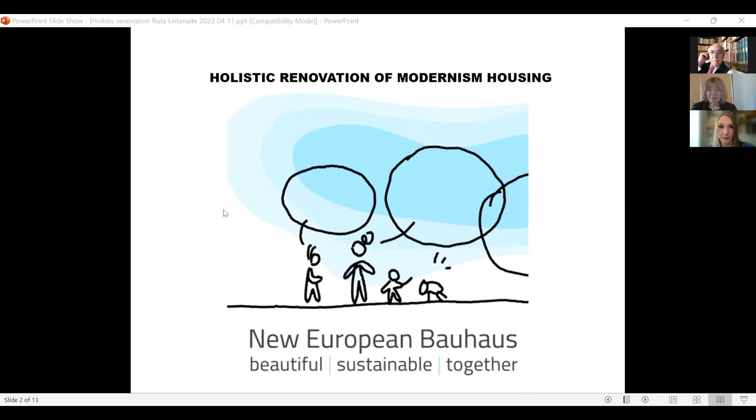In Lithuania, we have several governmental renovation programs, but something is wrong with them. Those programs have run for more than a decade, but the results are far from satisfactory.

Apparently, this is due to the restitution of private property after 1991, because in the Soviet Union there was no private property, so every housing unit belonged to the state. After independence, everyone got the right to buy real estate.

So after 1991, a foundation was laid for many problems related to the transformation of modernist housing, as every apartment now has its own owner and every decision must be taken with a consensus.

That applies not only to the poor activity and interest of the inhabitants, but also to the content and scope of renovation. Until now, the renovation of modernist housing, with some exceptions, usually ends with insulation and energy efficiency.

However, the New European Bauhaus is based on three values: sustainability, aesthetics, and inclusivity. The latter two are so far missing in our renovation endeavor.

So the main problem is that after renovation, the houses and whole micro-rayons, so-called districts, lose their architectural identity. No added value to the individual flats nor public spaces is created, and neither the communities nor the culture of living together are improved.

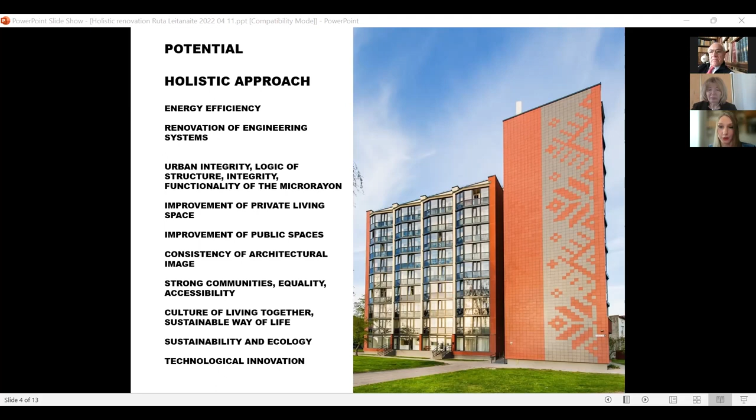Additionally, we search for chances for new financial and legal tools that will allow participation of different stakeholders in renovation. And also, we feel that although this housing stock is quite old, already 50 years old, we think it's a perfect ground for technological innovations to apply. So this initiative aims to gather an interdisciplinary think tank, as Angela mentioned, to create a methodology and toolkit for a holistic renovation and to test it in a pilot project.

What we've done so far in Lithuania: last year, in 2021, with partnership of the Ministry of Environment and the Ministry of Culture of Lithuania, the Architects Association of Lithuania had organized 2 discussions and a workshop with more than 60 participants.

The discussion was moderated by me, aiming to highlight the multifaceted nature of the topic and to gather a variety of ideas. An interdisciplinary panel was selected, featuring architects, historians, designers, geographers, city planners, activists, politicians, lawyers, construction materials producers, communities representatives, writers, designers, and representatives from relevant institutions such as universities, ministries, heritage protection department, Vilnius mayor, etc.

So we wanted everyone to get on board and to say what they think on the topic and what would be the main challenges in their field and what could be the opportunities.

When we were aiming at the topic, holistic renovation of modern housing, we saw that there are many different topics to address. So in the discussion, some questions addressed by the panelists were, among others, artistic and historical value: identification of the artistic, historic, and cultural value of the housing built in the Soviet period, second half of 20th century. How can we preserve those values during the renovation?

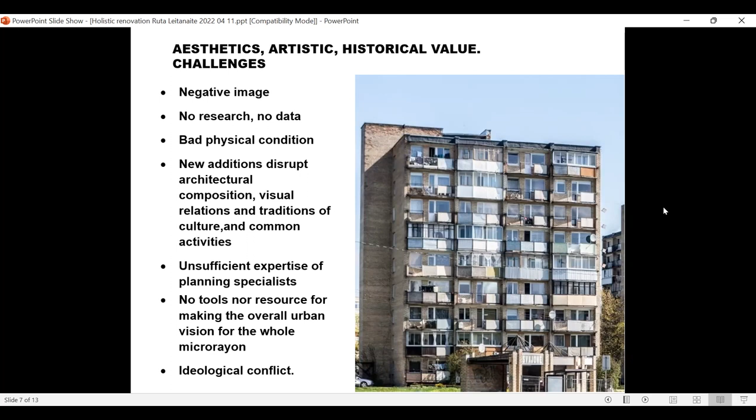Then we were talking about the vision. How can we perceive the reconstruction of this modernist housing? First, we have to shift our mindset and think that beautiful is not only about beauty. Beautiful is sustainable and functional. We cannot separate those three values.

Then we have to strengthen the architectural identity of those districts, so it creates identification and love by inhabitants. And then we have to create a renovation vision that would suggest an attractive environment as an alternative to the charm of the old town and suburbs.

Here in my presentation, you can see pictures of some districts that were built in the 50s, 60s, and 70s in Lithuania. This one in particular had one of the highest urban and architectural prizes in the Soviet Union at that time.

What are the tools to aim for that vision that we want? We think that a holistic research should be implemented before renovation, and by holistic we mean technological, aesthetical. We have to analyze the cultural relationship, talk with the community, and so on. This holistic research should be done before any project.

Then we propose that architectural competitions could be a tool to achieve the highest quality of the renovation. And of course, any renovation should result in some added public functions, because we feel the problem with this housing is that people live like in matchboxes and they don't meet.

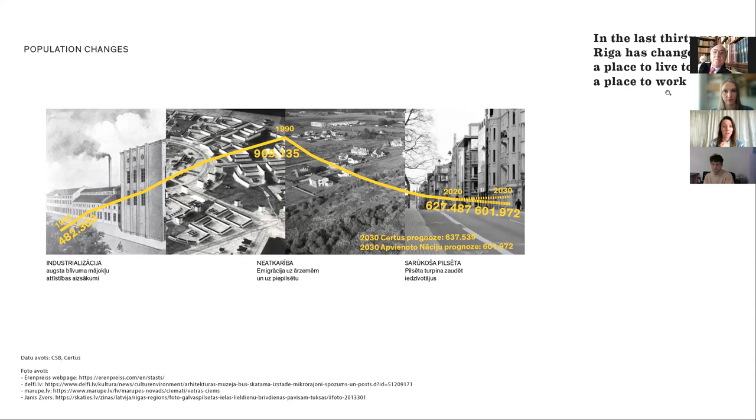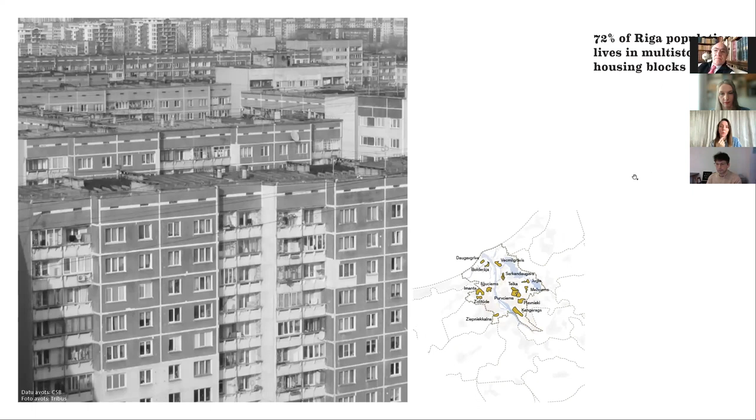Another interesting aspect is that 72% of Riga's population lives in multi-story housing blocks which are all similar. Between 2000 and 2020, population in Riga's suburbs has grown 20%, so basically people from the center are continuously moving out to the suburbs. Why so? Life in the suburbs offers larger living space - in the center average space is something like 56 square meters, in suburbia 92. They can have more green space, a safer environment, accessible primary education, and social benefits that altogether give a higher life quality.

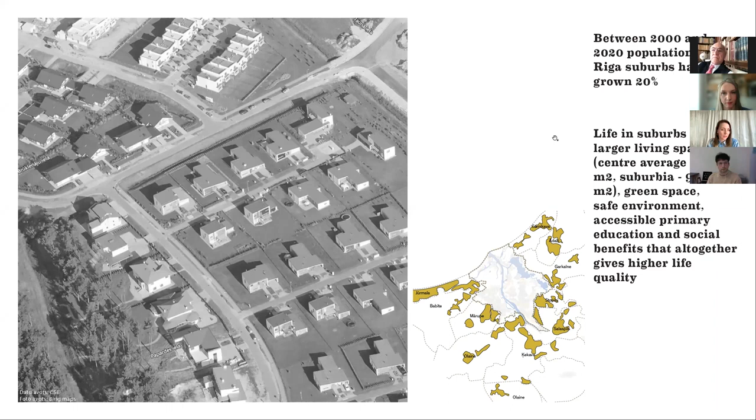Compared to Riga, when we look at other European cities like Copenhagen, Oslo, and Vienna, they are not only livable but also compact. So we're interested in looking at Riga as a potentially compact city, because the more compact you are, the lower the costs on infrastructure expenditure. Oslo achieves a livable city by working with the waterfront. Copenhagen treats velo infrastructure not just as infrastructure but as great public space. And Vienna is an example of great housing with good outdoor spaces.

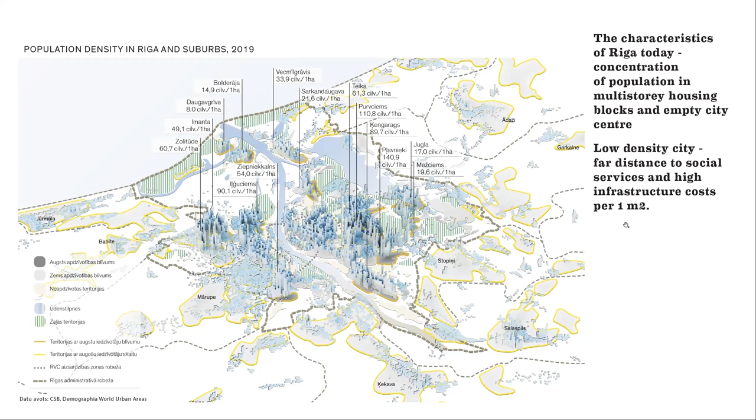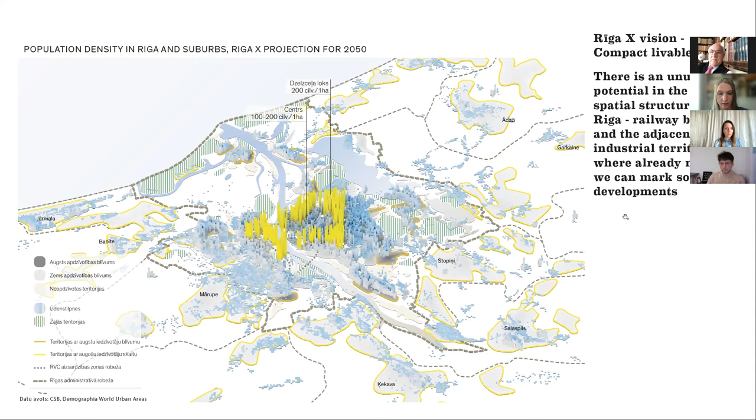Riga X vision is talking about a compact, livable city. We identified a space which is close, around the Riga city center, shown in the image as yellow bars. This is, in our opinion, the unused potential in the spatial structure of Riga: the railway belt and all the adjacent industrial territories, where we could already see through research that main developments are starting to happen around this space. It's a space next to the city center with the potential to be densified and developed as mixed-use neighborhoods. So compactness is a precondition for a livable Riga.

What we propose is that a big amount of the housing block inhabitants could also be hosted in the yellow part, the railway belt. Out of an abstract calculation, a 10 square kilometer territory with 200,000 inhabitants and 80,000 housing units generates around 200 people per hectare population density, similar to Vienna city center.

It's not that we are proposing to move the inhabitants entirely from the outskirts blocks to the center. However, due to the necessity of renovating the housing blocks, people will need to go somewhere, and also because these housing blocks have much smaller space per inhabitant, we need to find more space anyway.

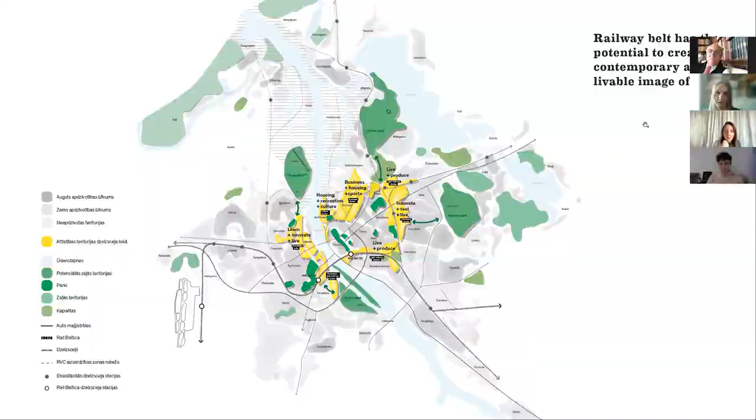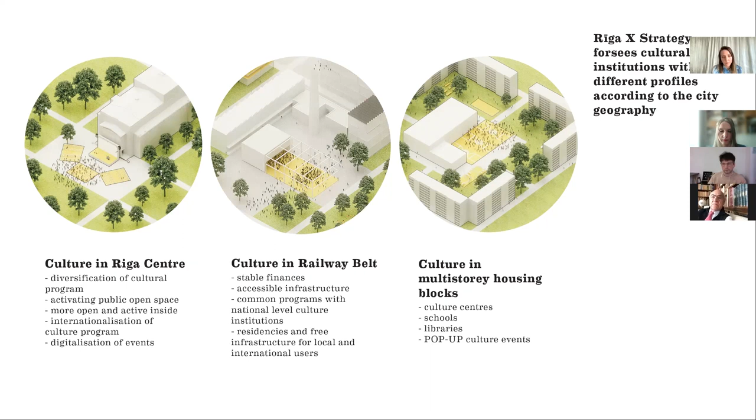Just a couple of spatial examples: the Rail Baltica railway connection has potential between the airport and the central station. Then a 5G network between Knowledge Mile, which is the knowledge cluster on the left side of the city center, and satellites of the biomedicine network, and potentially a drone corridor that creates an innovative basis for testing future technologies, including important materials and substances, for example organ delivery.

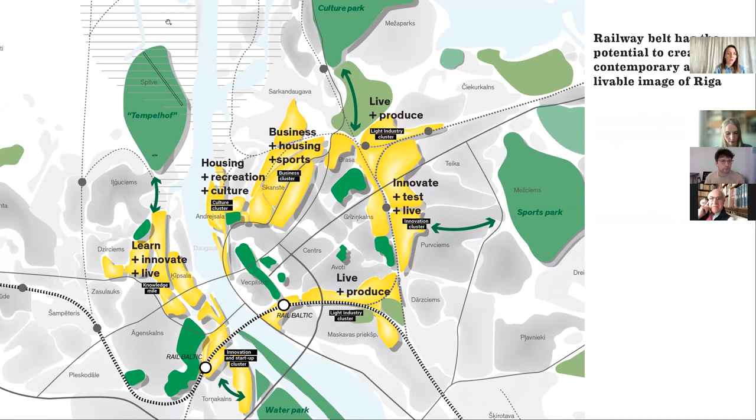So to conclude, it's all about the smart clustering and strategic location of right programs combined with housing, culture, innovation, and education.

So I will go a little bit more into housing. Housing stock in Riga is actually in a critical condition because most of it is built more than half a century ago, and out of around 6,000 multi-story buildings, only very few are renovated.

In terms of ownership, you also see that a very small part is a rental housing sector. It's mainly privately owned, also as a result of the privatization process.

But we have also an issue that approximately 20% of housing, which amounts to 64,300 housing units, has this split property condition, which means that in some areas like Purciems microrayon, this multi-story district, you see that some of the large buildings are actually cut by land ownership below. So they are forced to pay rent to the historical owners. And this is a kind of locked-in situation where development of those buildings is really difficult.

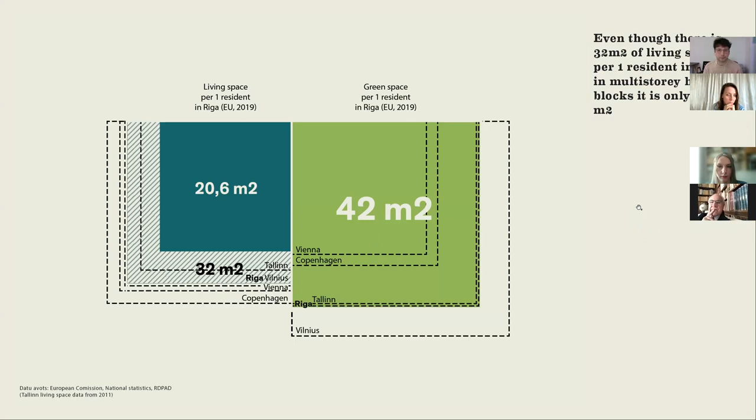In terms of living space, Riga has 32 square meters per person, but these micro districts have only 20.6 square meters, which is very low, while there's a big potential of green space, actually 42 square meters per resident in Riga. So we have this contrast situation with very congested apartments, but a lot of untapped potential around.

Who lives in Riga? We see that the inhabitant structure is changing a lot, and that requires a bigger diversity of housing that is also better suited for people who are living without children, which is predominantly the 75.5% majority of the people.

And this is the reason why we believe there needs to be institutional change. We call this, abstractly, the Housing Competence Center, which could deal with exactly the topic of affordable housing, both as rental and privately owned property. This would address young families with children, police, nurses, etc., people who urgently need access to high quality housing.

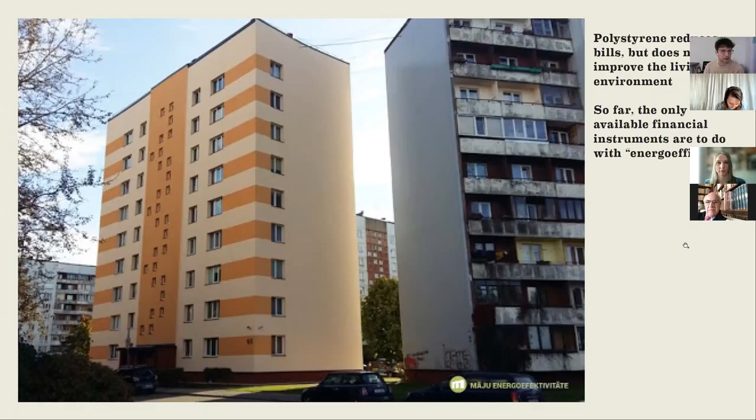The issue is that so far we have only had one financial instrument, and that is to do with increasing energy efficiency. We think this is absolutely wrong, because polystyrene reduces energy bills, but it doesn't improve the living environment in those districts. We believe there needs to be a new set of values for improvement of Riga's housing stock.

And all of these values should become new financial instruments. We classify them under three categories: architecture, environment, and social resilience.

In architecture, we are talking about spatial flexibility, that plans and sizes need to be really different and adaptable. There needs to be livable outdoor space - terraces, balconies, verandas - live and work options with studios, ateliers, and workshops. Collective communal space is very important in these neighborhoods, like babysitting rooms, collective kitchens, apartments for guests, workshops, saunas. All of these spaces are extremely important.

And we are also thinking about an innovative technological approach. There are some cases where, for example, contemporary timber construction materials could be provided by the local economy, and that could work really well together with the new development of housing.

Energy, of course, is part of it, but it's definitely not the number one point in architecture here. Environment, again, playgrounds, green courtyards, bicycle sheds, picnic tables, places for sport and recycling, mobility, shared mobility, proximity to regular public transport, and cultural vibrancy, access to public services, culture, education, and well-being, extremely important, as well as digital environment.

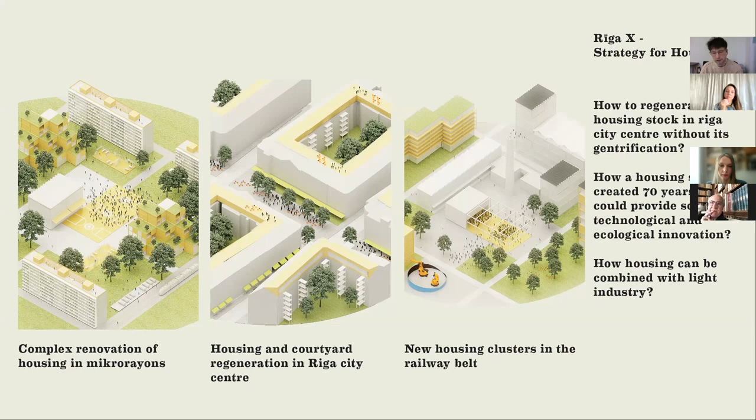Then the strategy is focused on three parts, and in one sentence, it's complex renovation of housing in micro-rayons. I will explain what we mean by complex. Housing and courtyard regeneration in Riga city center, and new housing clusters in the railway belt.

So for the city center, we ask how to regenerate the housing stock, which is here in the historical area, avoiding its gentrification. We believe that it's to do with architectural approaches such as special rules for ground floor public use of buildings, roof transformations and gardens, as well as freeing courtyards from cars and giving them back to the residents. The environment is the green courtyards with all the functions that I mentioned before, shared mobility options, activation of streets and squares, as well as educational aspects of the building culture.

And social resilience is extremely important in the Riga city center, because that is key to avoid gentrification, and it's the provision of affordable and social housing in the city center, not far in the outskirts. We also have some examples from Helsinki and from Oslo, which are related to our ideas.

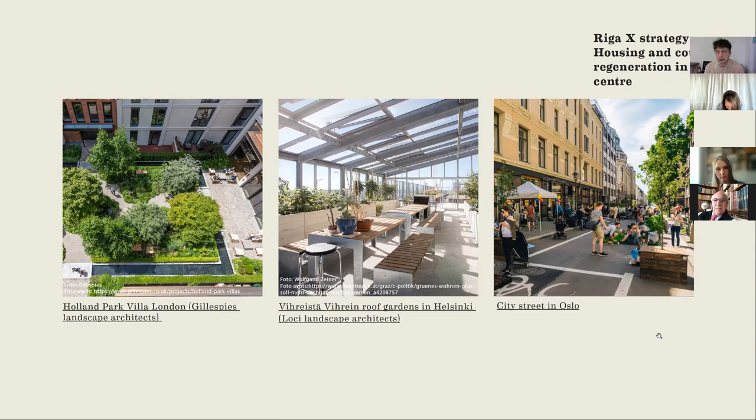Now, if you go to the micro-rayons and what we mean by complex housing — I would say that all of this research project you could define as holistic, but the approach of housing renovation in the micro districts really needs to be complex, because it needs to answer the question of how the housing structure that was introduced 70 years ago could deliver technological, ecological, and social innovation.

To answer that, of course, it's one part of architecture to really create these unique pilot projects, because actually there are not that many in the world that we see as good examples. But a big part of it is how they come to be organized and how they come to be realized, because it requires involvement of the city, it requires involvement of the state with some financial tools.

And it requires, we think, this additional institution, like this center, that brings together the residents, explaining what is possible and organizing these new pilot projects.

And we believe that architecture-wise, we definitely need to increase square meters of living space per resident in these neighborhoods. In terms of environment, again, it's about access to transport, mobility, gradual regeneration of the common spaces, and it's also very important to maintain environmental qualities during construction of buildings.

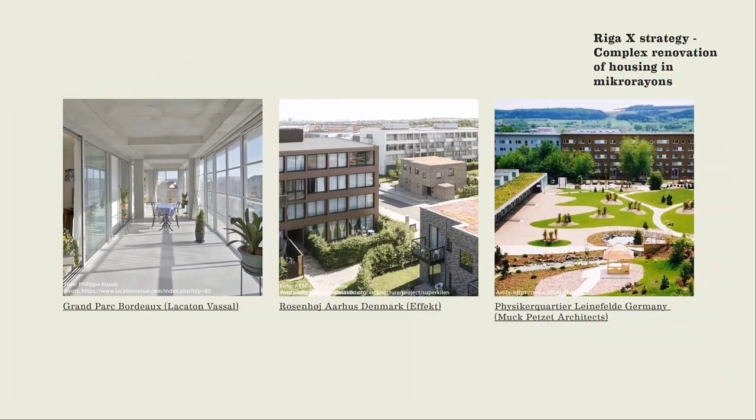There are some examples which I'm sure you are familiar with already. And if we go to the final part, it's the clusters in the railway belt, and the railway belt needs to answer the question of how many new homes can become part of the city with high livability and create a new identity for neighborhoods.

We believe there is a possibility to also reanimate some of the industrial ensembles which are on these brownfield, post-industrial sites. And we think that this is really a possibility for a kind of light production to come back, light industry to come back into the city.

So we think that these areas could be active all year round, all 24/7 hours a day, that they are never just sleeping districts, and they have a high cultural vibrancy. So there is the culture in here, cultural aspects, and there are aspects of these economic drivers like IT and education sectors, which are already very active in Riga and showing a big potential.

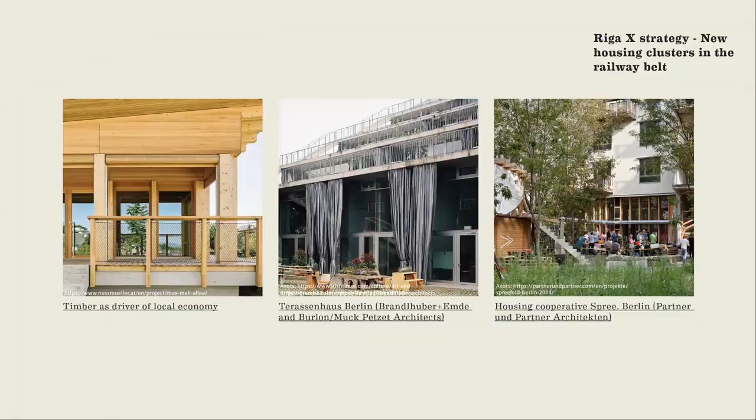So to conclude, this is our drawing of Riga with three very clear strategies for three parts. We are not ignoring other parts; we are just highlighting those parts that we think are key and more important and have more potential than others, to make this image of a livable city a reality one day. Thank you for the attention.

Congratulations, excellent presentation. Thank you, Dagny and Niklas. I am very happy to see and hear that Lithuania and Latvia are on the same page regarding the current situation, which is not very optimistic, but still with the ideas we are really on the same page. And I really hope that this conference is the start of our maybe future collaboration. I would be very happy to continue sharing ideas and expertise. Thank you, and we will move to the next presentation.

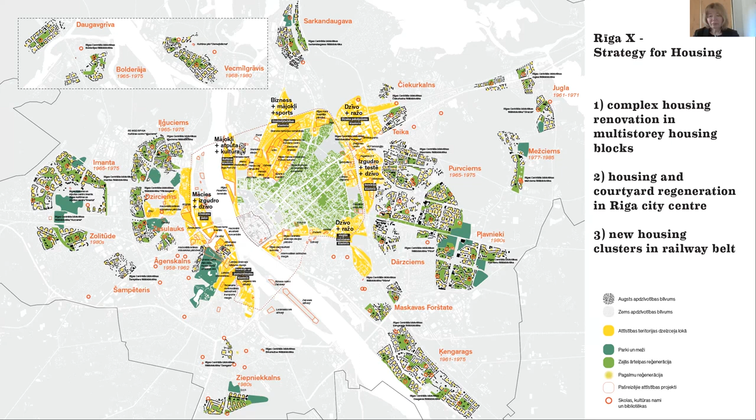Of course, when we were starting to organize this conference and discussing with Olena that she would make a presentation, the world was different. Right now, I think this presentation will change the whole discourse of this conference and the view on the topic. I am really, really happy and thankful to Olena and Arkady that they agreed to participate in our conference, knowing that they are probably busy emotionally and mentally with many other issues happening right now in Ukraine. Thank you very much for being here, dear Olena and dear Arkady.

I am sure this is not the end of our collaboration and sharing of ideas, but today we really are eager to know what is happening in Ukraine. I know that Ukrainians are sure that the war will end with a victory of Ukraine. We are sure of that as well, and it's high time to start thinking about how we will deal with all the legacy of war, and how we can create an opportunity of quality living for Ukrainians after the war. So Olena and Arkady, the floor is yours.

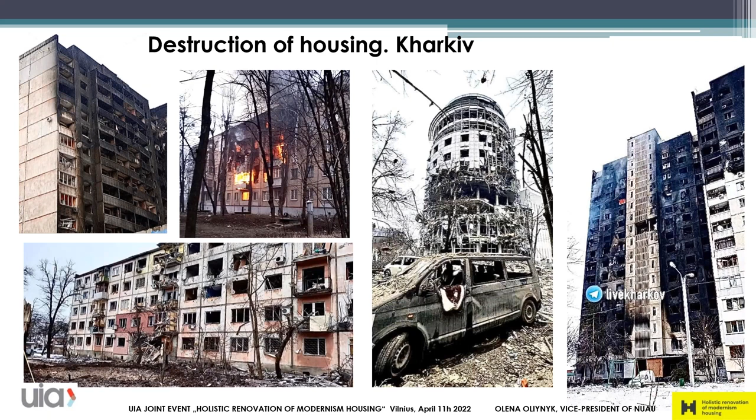And the enemy is destroying residential neighborhoods, hospitals, schools, architectural monuments, entire cities. Such cities as Chernihiv, Volnovakha, Irpin, and Bucha have almost completely destroyed buildings.

And do you know that the war is continuing? So how do we rebuild so many destroyed houses? Ukraine already has a bitter experience of post-war reconstruction and housing construction for migrants.

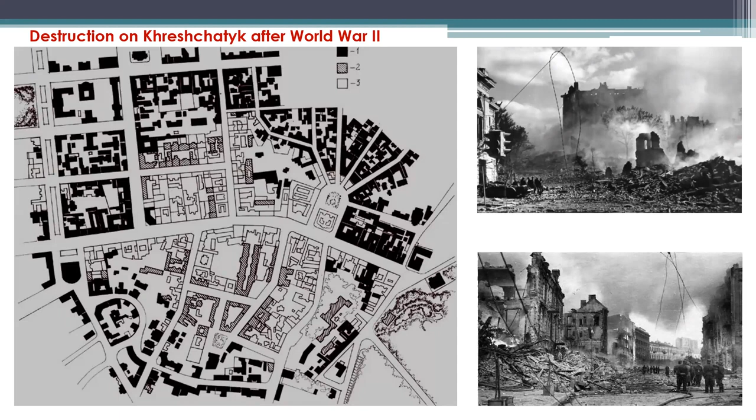The first large-scale restoration began immediately after World War II, when Kyiv alone was destroyed by 70%. Until the end of the 50s, Ukraine completed and rebuilt cities destroyed in World War II. Prefabricated houses, which allowed the construction of economic buildings at a rapid pace, then came to the aid.

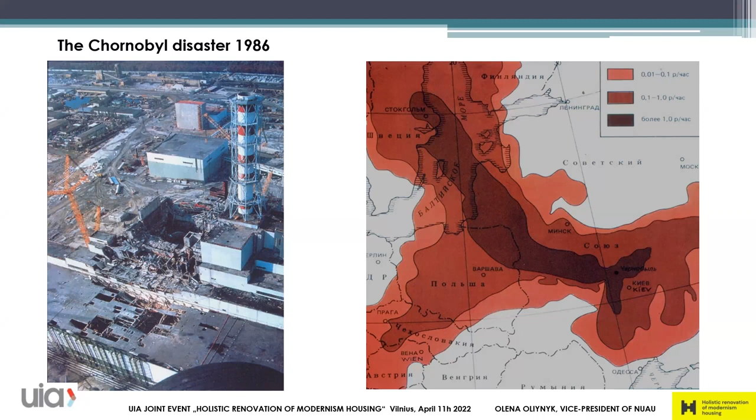Later, in 1986, the Chornobyl disaster forced thousands of people to become displaced. Then, in a short time, the task to relocate a large number of people from the affected area was solved.

Then a lot of work was done in a very short time. The basic principles were as follows.

Construction of new settlements on the basis of urban concept for each one, with the formation of all necessary functional zones. Then creation of complex project groups that worked on the construction sites until their completion, carrying out constant author supervision. Then simplification of technology and sequence of urban planning schemes, control over social content, use of standard projects of housing, schools, kindergartens, shops, communal constructions, engineering objects, with binding on construction site according to the simplified schematic master plans.

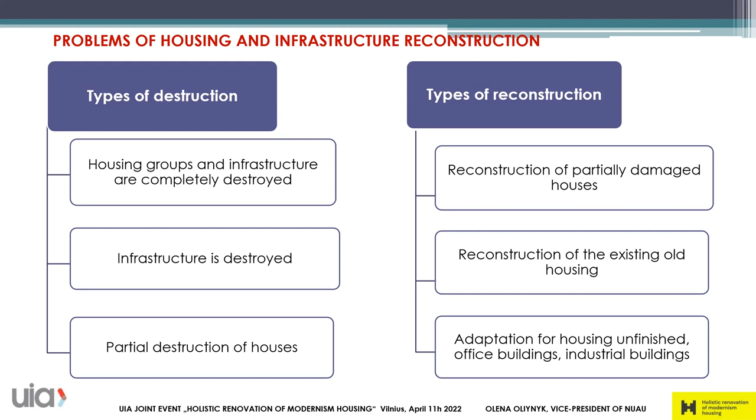If the house is damaged in such a way that it cannot be restored, then the question of its alternative replacement arises.

Hundreds of thousands of families will need new houses after the victory. The rapid provision of housing for those in dire need will obviously be addressed through the technology of prefabricated modular construction of temporary structures from blocks, containers, or from linear and flat prefabricated elements, or from a combination of both. But at the same time, we need to address the problems of building more long-term and comfortable houses.

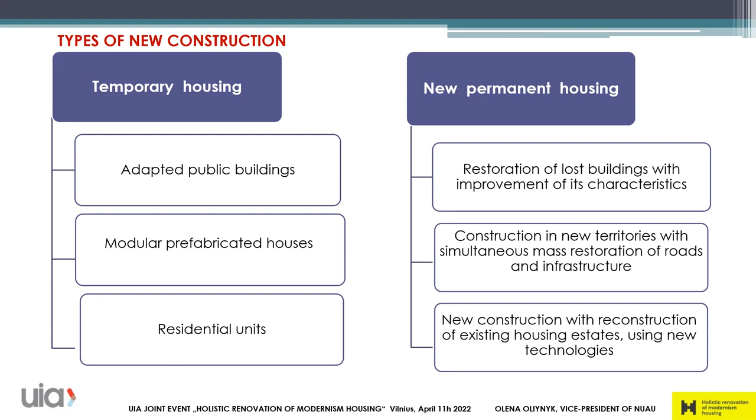Let us see some examples of reconstruction of existing objects from foreign practice.

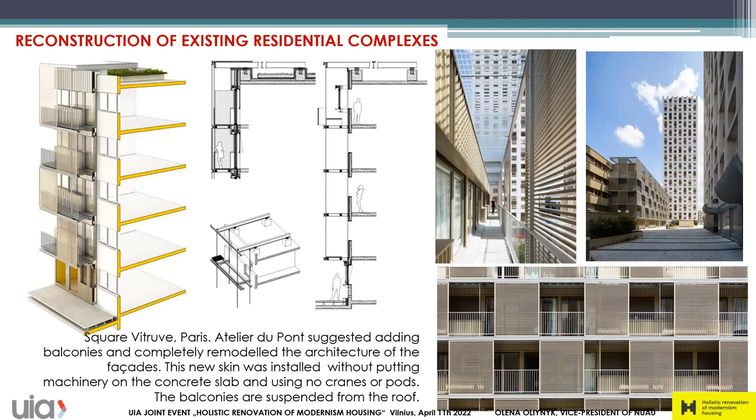This picture shows Square Vitruve in Paris. Atelier du Pont suggested adding balconies and completely remodeling the architecture of the facades. The balconies are suspended from the roof. Interesting that this new skin was installed without using any cranes or pods.

So the methods of reconstruction of residential buildings can include changing the constructive scheme or not, changing the construction volume by extension, changing the plan dimensions, changing the appearance of facades by balcony or facade system.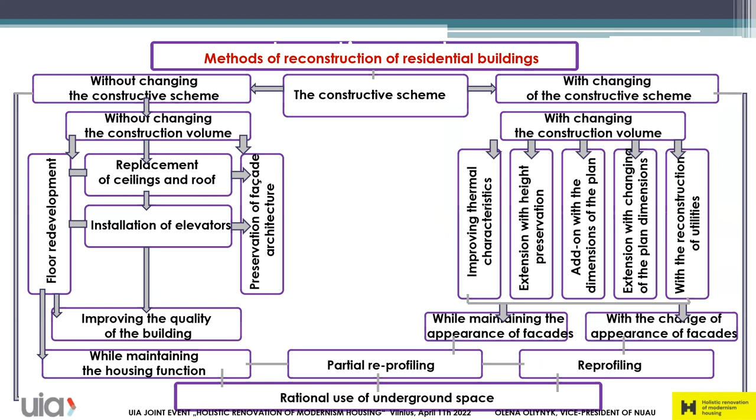We have now some specific proposals from Ukrainian engineers for the rapid repair of destroyed panel of frame monolithic housing.

It is only an idea, but it can be made just on the place. Such kind of repair building in situ.

Prefabricated temporary modular construction can be made from block containers or small panels. Then it matters only the presence of modules, the speed of assembly and disassembly, and the possibility of reusability. Ukrainian architects propose various types of temporary housing.

Here is proposal by architect Slava Balbek called Dignity No Matter What, which creates usual and healthy lifestyle and decent conditions even in temporary residence. Main constructive principles are modularity, scaling possibility, and flexibility. Social principles are dignity at first, then socialization and comfort.

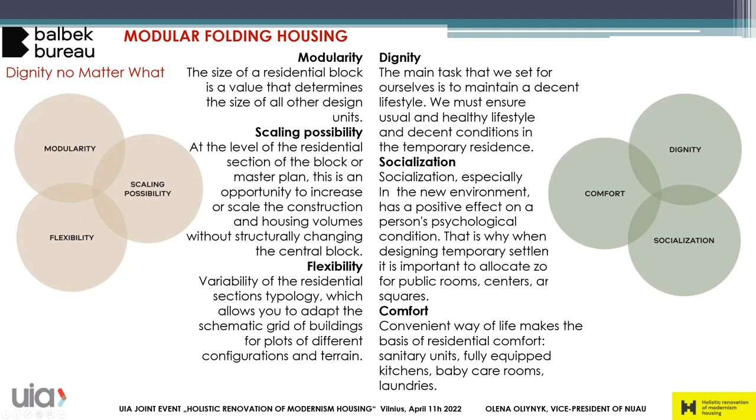Speed, budget, and resources are the main points for realization.

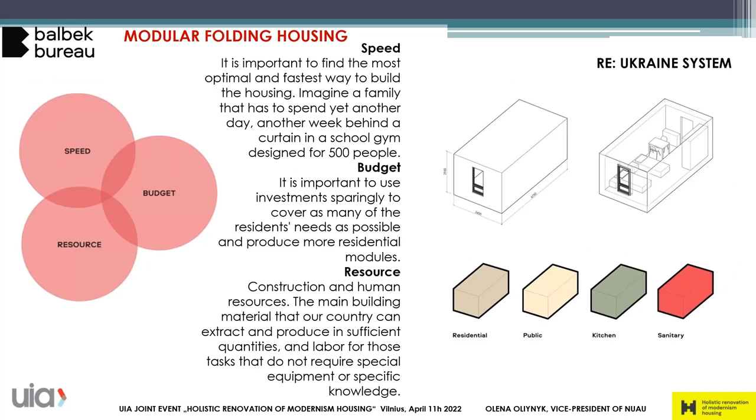Modification of residential modules are shown on this picture. You can see residential, public, kitchen, and sanitary, and its combinations.

This modification allows combining 5 types of sections. Section 1 is family type section.

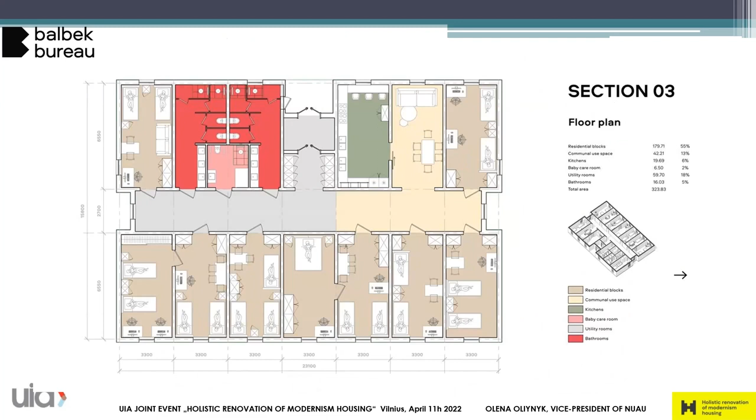Section 3 and 5 have common sanitary blocks.

Different combinations of sections allow quickly building a temporary settlement up to 1,880 people. The structure scheme is a wooden frame.

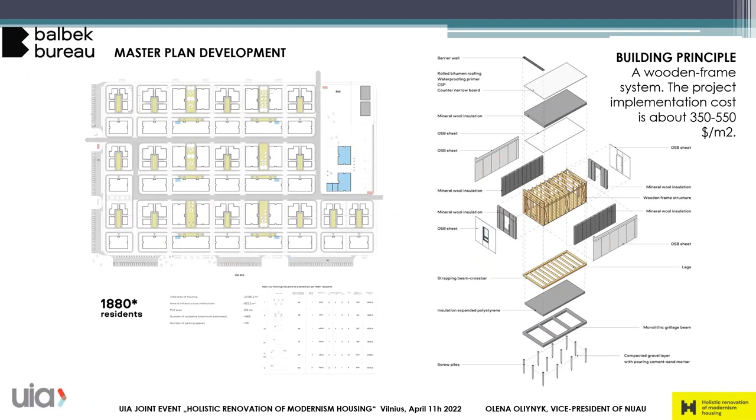Another type of modular folding housing based on a triangle offers Dekart Studio from Odessa. Their units are simple, made from local available materials, with partial recycling. They do not need to attract special vehicles. Authors promise minimum energy consumption and minimum emissions into the environment. This temporary housing may transform later in 5-10 years into country hotels of holiday village category.

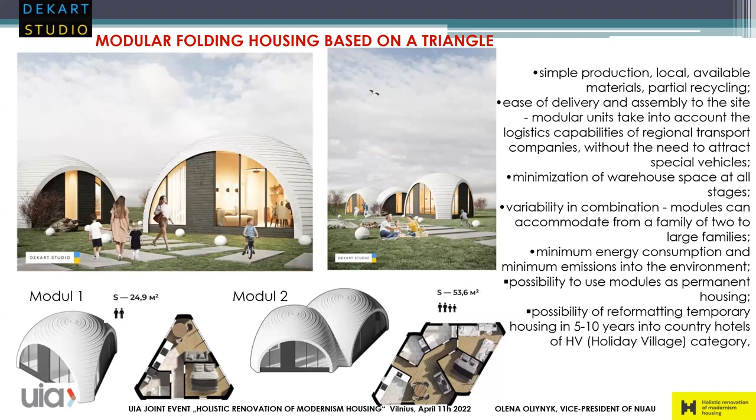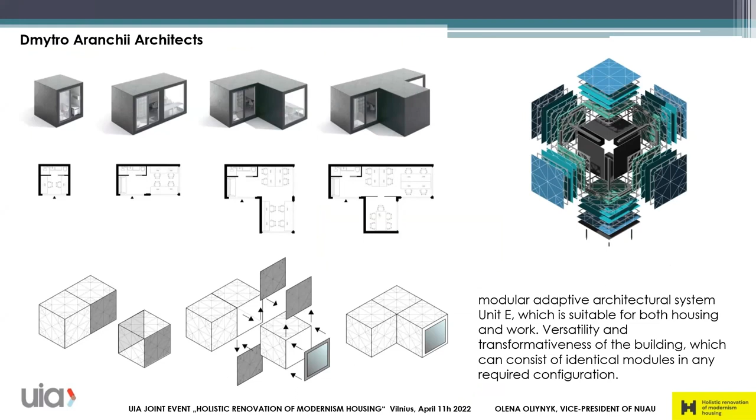Dmytro Aranchii Architects presents universal multifunctional blocks for housing, mobile offices, and public institutions. Such modular units can adapt to different functions.

There are 3 ways to further use modular elements: reuse of modules for other functions, reuse of components of modules for other needs, and redesign of materials and elements. All these pathways correspond to the concept of cradle to cradle.

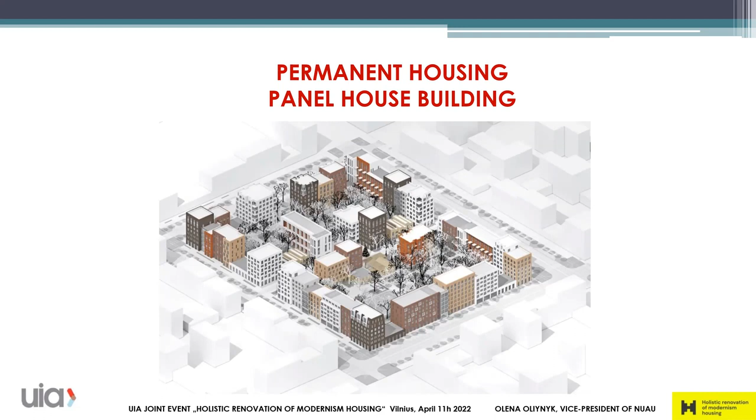The prefabricated construction industry takes many forms, from the production of small-sized flat elements of factory production to large-scale volumetric blocks of full factory readiness. One of the main requirements for the design of industrial construction is modularity, which requires methods of unification and standardization of design solutions at all stages of design. Repeatability of building elements is a necessary condition for the application of industrial methods in construction, which is especially effective for mass housing.

Panel construction technologies are widely used throughout the world today, especially for the construction of mass housing. The simplest well-established technology in the world is large panel housing. The dimensions of cassette or bench products are well suited for the parameters of social apartments.

By creating projects of apartments with flexible planning, standardized areas of social housing is not relevant.

The location of the construction site, its proximity to existing sites and cities, as well as the availability of infrastructure, will have great importance.

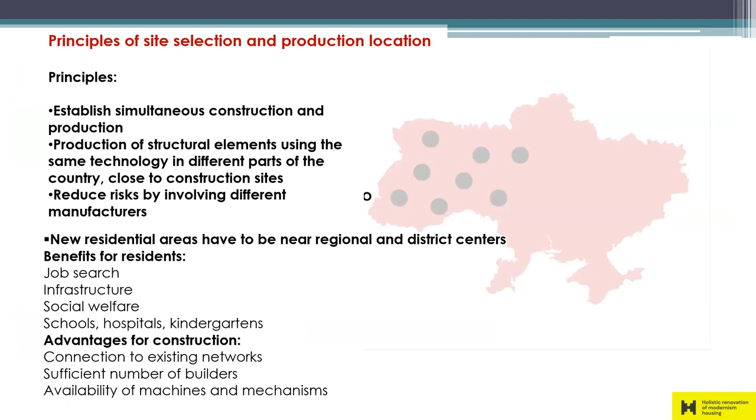Variability and types of elements must be determined by calculation. It is possible to erect quickly both volume block buildings and large panels with application of volume blocks, and only a large panel.

Constructive and planning system Nove Misto, offered by my co-author Arkady Peker, proposes options for combining different types of block sections, 9, 4, and 5 story.

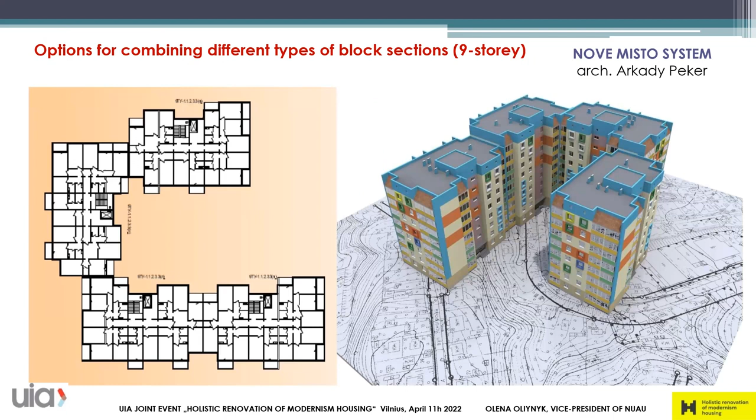Types of public buildings and housing that can be built from prefabricated units are very different.

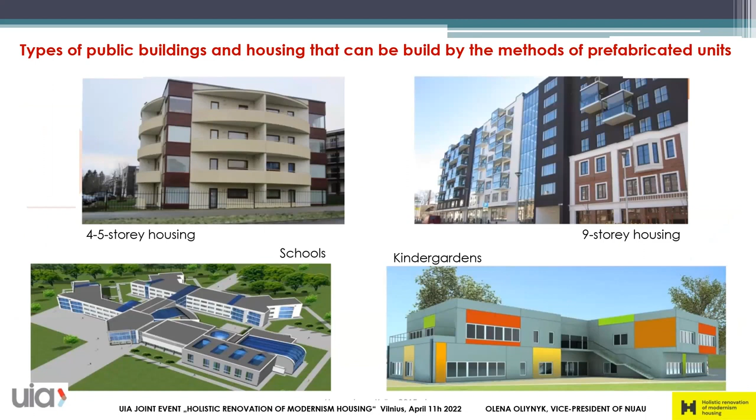House building plants will be necessary for the construction of such mass housing. Existing high capacity house building plants remain almost only in Kyiv, but the main volumes of construction will be in the center, south, and east of Ukraine.

It seems that today the most efficient are low capacity plants, from 50 to 100,000 square meters of area per year, which can be located within a few hours of transport accessibility from potential construction areas.

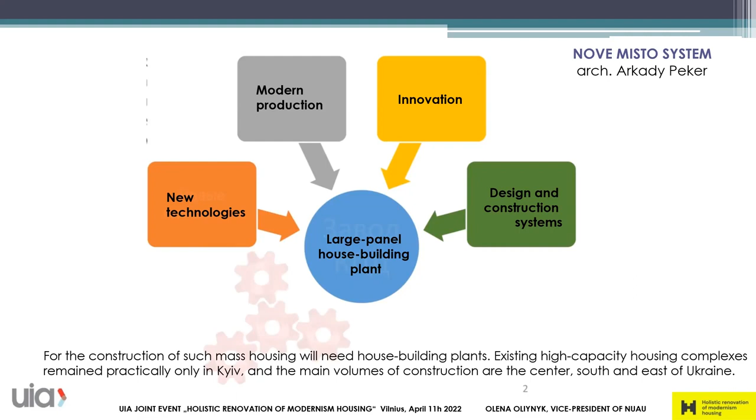To equip these plants, we will need the help of foreign companies specializing in the development, manufacture, and supply of relevant technological equipment. It is also possible to adapt factories of reinforced concrete structures.

Options of arrangement of sections of such panel houses are very different. You can see many versions of facades.

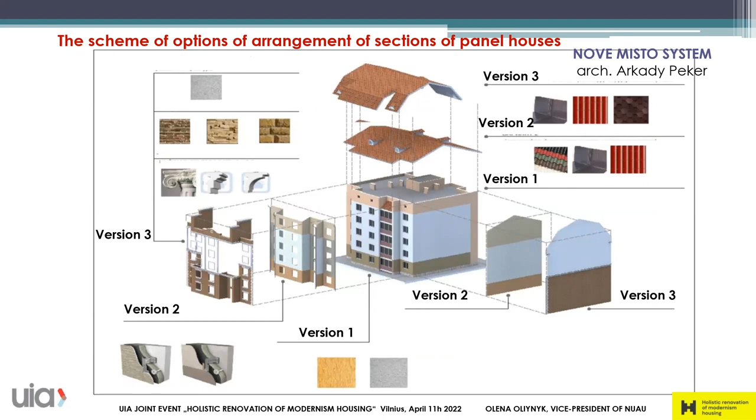The cassette principle embedded in the formwork design demonstrates a number of advantages: a technologically simple and low-labor-intensive production process. The quality of the surface of both sides of the products is identical to the quality of the formwork surface, and therefore it is possible to use it for the construction of walls and floors. Compactness of design in combination with high productivity. Possibility of processing concrete with various characteristics thanks to use of a highly effective system of consolidation. Low energy consumption due to the optimal use of hydration heat in the process of hardening concrete and the possibility of efficient heating of the formwork without excessive heat loss.

Scheme of the technological cycle of this plant.

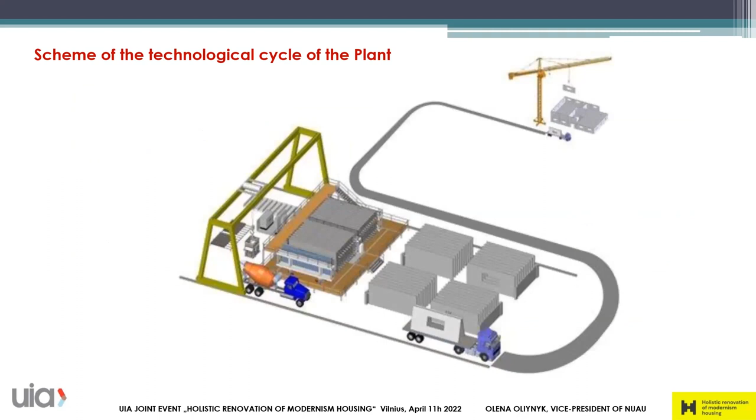So the requirements for implementation of this system are the following: adopt a state program that will provide financing for design and construction work, allocate land for mass construction, determine necessary production capacity and regions of their location, involve foreign companies specializing in the development, manufacturing, and supply of technological equipment, develop a series of residential buildings for reuse with the latest achievements in energy saving. In parallel, adjust the master plans of cities with the allocation of sites for mass construction, design and build external networks and road infrastructure in areas with mass construction, conduct inspections of damaged buildings to determine the possibility of their reconstruction, develop reconstruction projects based on modern technology, and conduct tutorials and technical supervision.

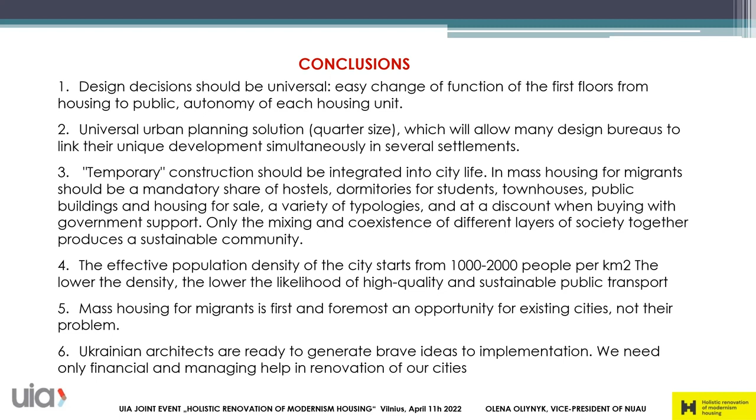Thank you, Elena. Congratulations, very good presentation. Of course, the challenge is enormous, especially for temporary housing as the next step in the near future. But I hope the war finishes soon and we can start giving a lot of ideas. I'm sure Ukrainian architects have great creativity and talent to develop very good options. Congratulations, Olena.

Thank you, Alina and Arkady. From our side, that's the spirit. I really admire your presentation because you are looking forward to an optimistic future. While we are talking here about existing housing and saying never demolish, you have a totally different situation—people came and are demolishing everything, and you will have to rebuild your cities from scratch. So somehow you are in the situation of creating a new modernism, or I'm not sure what the name would be. But as a council member of UIA and also the Architects' Council of Europe, I can promise that you will have the support and collaboration of the global community of architects. I hope we will contribute to the implementation of your ideas and empower your teams with expertise and hands. I'm really looking forward to the near future, and glory to Ukraine and Slava Heroyam.

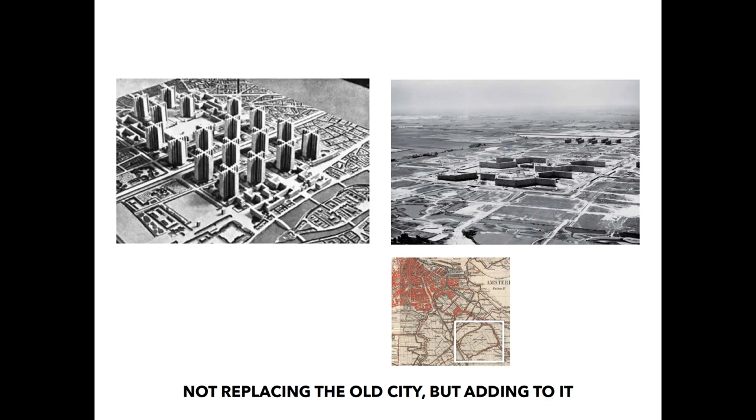This was meant to become the city of the future—the most perfect example of all the scientific knowledge, and scientific is of course very relative in this sense. This scientific knowledge about urbanism and architecture would bring the perfect place to live. And almost all of it was going to be housing.

I think that's an interesting thing—that in the last half a century, urbanism has been about housing of common people. It was not about palaces, about cathedrals, about opera houses or theaters. The stuff that we make the cities with, the stuff that we make architecture with, is housing of common people, affordable housing for common people, which is historically quite an exceptional period we've been living in. I think this is something we've gained in the last half century that we should try to keep as our focal point as architects.

And of course, because it was new and modern—at least what they thought was going to be the contemporary way of living—people didn't know it. So people needed to be helped with how to live there. The Intervam system is the system with which Kleiburg was built.

They made show houses, not only as a physical model to see how it was built, but also to show with the right furniture how you should live there, what modern ways of living were. People coming from really cramped living places in the city center of Amsterdam were given a kind of grand new, completely rebuilt way of living, and they should be educated in that. The architects spent a lot of time getting all the kitchen cabinets in the right place and making the flow in the house work correctly.

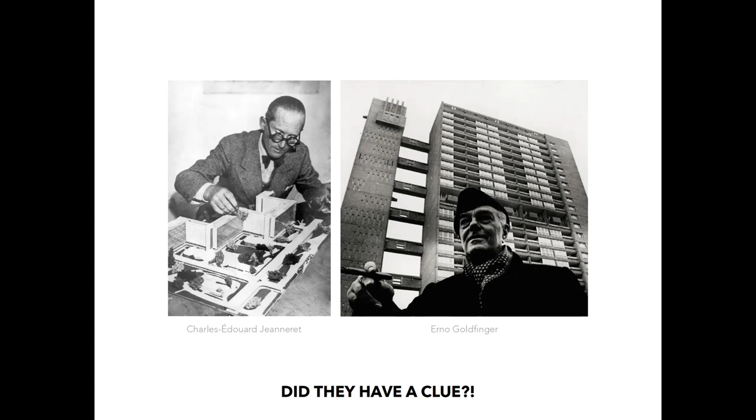A lot of people have blamed the lack of knowledge and also the kind of strange, new ideas about urban living for the failings of a lot of these modernist estates. And also the Bijlmermeer was kind of a problem right from the start.

These projects were never beautiful, or never meant to be beautiful in a way. A lot of people still say about Kleiburg, it's an ugly building, and I can't really blame them for saying that, because Kleiburg was never maybe meant to be beautiful. Its beauty lies in its purpose of offering affordable housing, equal opportunity to a lot of people, and turning this purpose of housing into a radical aesthetic.

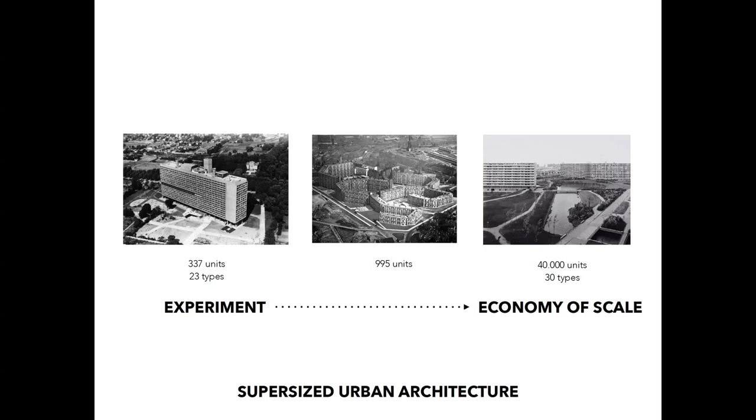One of the problems with a lot of modernist housing, which I also saw in the plans of Riga, is that the ideas behind it come from a supersizing of an idea of urban architecture, starting with Unité d'Habitation, a solitary sculptural building by Le Corbusier sitting in a lush green landscape. This was added on to and knitted together by the proposal by Park Hill, which had three times as many units, and then forty times as many units in the Bijlmermeer, similar housing types just supersized. The economics of this development chipped away at the quality of a lot of these projects.

We're tempted to only show the heroic and beautiful examples of this modernist housing, for instance Alt-Erlaa, Lignon in Geneva, Mirail in Toulouse, and the Bijlmermeer in Amsterdam. But I think these exemplary projects are maybe only the great 1% we like to look at. Most of the housing blocks are not as good.

Unfortunately, especially moving from the 50s to the 60s to the 70s, quantity dominated over quality more and more, and I think it would be too simple to just say these buildings are good just because they have a modernist legacy as their architectural idea.

But all of them, despite their architectural and urban quality, offered high quality affordable housing. By high quality I mean spacious, light-filled, well-ventilated, affordable housing, large square meters, relatively well-proportioned rooms, an urban architecture without an ego, purpose over aesthetics. The purpose is the aesthetics, and I think this legacy is still very relevant, in which high quality and affordability are very pressing issues in every city in Europe.

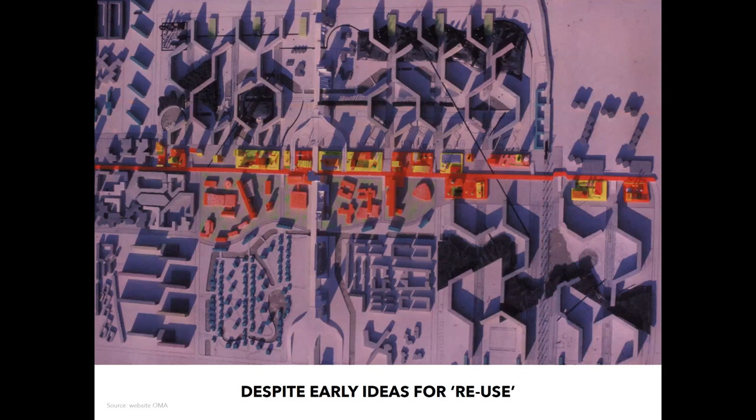For me, I think that's what we also did in Kleiburg, and we are still doing in the modernist housing stock we're working on today. We try to shy away from evaluating whether it's good urban architecture in an aesthetic sense—a lot of it isn't actually, it's not bad, but it's also not particularly good in any way. We try to ask ourselves how it can still contribute to the city of today in affordability and spaciousness, qualities which are almost impossible to replace if you took them away and built new again.

How much do we have to fix in these buildings? I think we are very tempted to start fixing aesthetic things by adding architecture to a project, but we have to be very critical about what we actually need to fix. Everything we add to the project is something we also have to pay for, and the residents have to pay for.

The issue of beauty isn't really that relevant, I think. Does the architecture serve the purpose that it's meant to have in the city? Don't add stuff just because it's aesthetic. Reuse should be a strategy to offer as much to the city as we can with what we have—it shouldn't be a goal in itself.

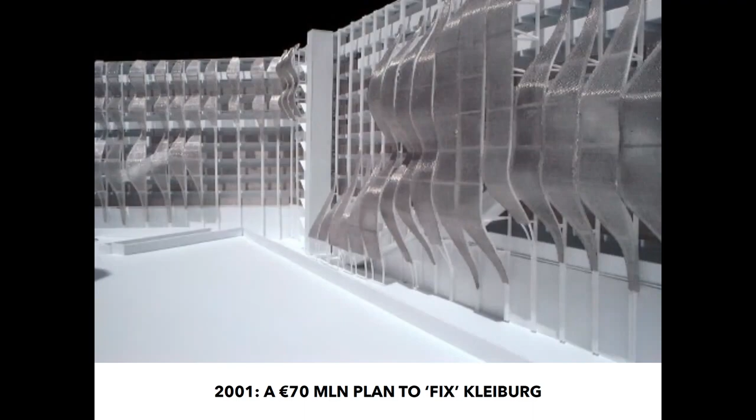This was actually the reason our project could go through, because 70 million was impossible, and anything else was also not possible in the economic crisis. So what to do was the big question that led to our project.

Now, Kleiburg at the time - I'll go quickly into what we actually did, because what we did was try to do as little as possible. The housing stock was for us very well usable still, but open for different ways of living than the architecture initially envisioned. So we thought, if we open up the houses to different modes of living, different family types, the diversity I think is one of the key challenges and qualities of the contemporary city in a cultural, ethnic, and economic sense.

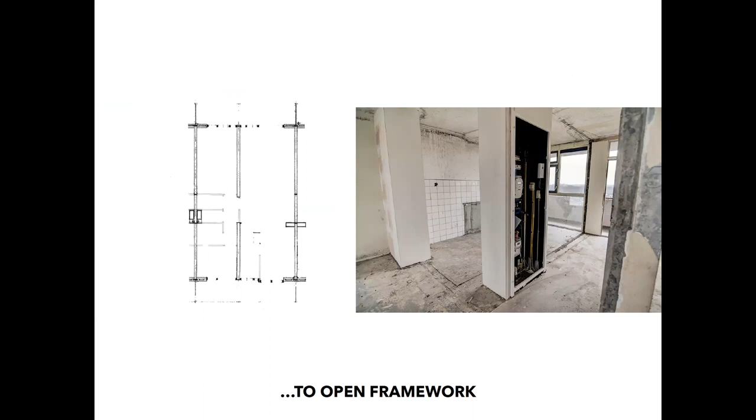Solve everything between the front door and the city, fixing the functionalist dogmas about pulling apart traffic flows, cars, pedestrians, cyclists, but for the rest, do as little as possible. Do only what's necessary. So we renovated the facades, brought in new sustainable central ventilation, heating, and electricity, but the rest was left open to the new inhabitants to make their own in their own way, and they did in spectacularly different ways, from artistic interventions to modest ones to slicker generic urban living types, reflecting the diverse economic possibilities and ambitions of people.

Our main focal points were on the collective parts of the project, reconnecting the building, because I think if you'd ask what was really the issue with Kleiburg, it's not that it was made from concrete, it's not that it's 500 times the same house. It's the fact that the entire plinth was made of storage spaces. The original pilotis of Le Corbusier were taken out of the equation, but it was sitting on a dead plinth of storage spaces without any connection to public space.

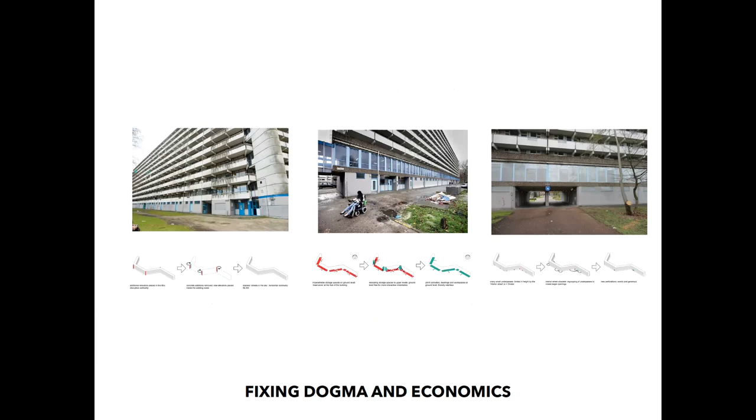So we took them away. We reopened the underpasses underneath the building, and took away the elevators that were added later, scar tissue that didn't work because they were too cold, too hot, too damp, too moist, and the machines were almost broken. So that's what we changed - we opened up the underpasses and reprogrammed the ground floor with housing and business units. For the rest, we did as little as possible.

We forged new urban relationships between the building and the city, which had of course changed over the 50 years. We made the entrances with the grandeur that fits the urban gesture of the block, and revisited the original ambition in a way. I think our renovation finally made it what it was originally meant to be. I think that was the last slide.

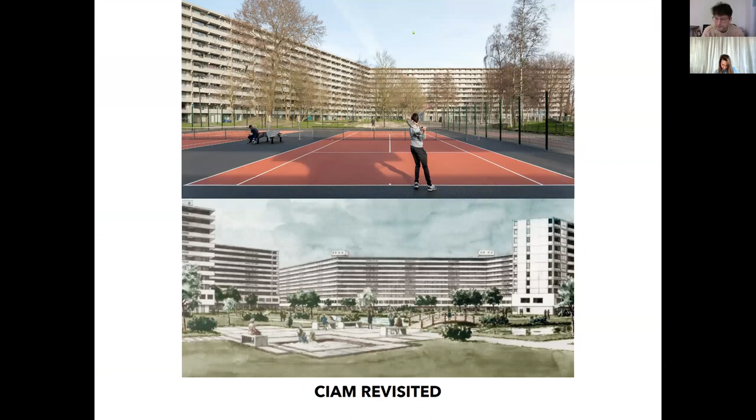Thank you very much, Xander, for your inspiring presentation - inspiring not only because of the result, but because I always admire this approach to the architectural profession, this humble approach where instead of making a landmark, you do as little as possible, thinking not about implementing yourself as an artist, but about the inhabitants and such simple things as daily economy. I think this is where the architect's profession should go further, and I think the next presentation will also follow this example.

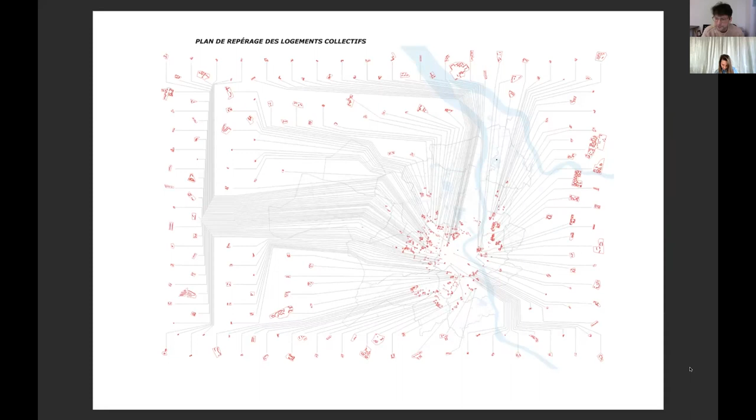That's what we usually do in urbanism. So we defined this concept of capable urban situation, and we said there are hundreds of situations like this where you can find something very interesting to create a new project and transform the places.

So what I want to say this morning is I'm not using the word 'reuse' or this kind of concept. I propose to you to think about transformation. It's very clear: you take things as they are, and you work on it to bring it to another state.

So let's go to the project in Bordeaux. This neighborhood is called Le Grand Parc. It was built at the beginning of the 60s, and it was the first suburb of Bordeaux in the 60s, and now it's very close to the city center. You can see the 18th century city going through, touching the Grand Parc urban plan.

The Grand Parc is very simple. It's a little brutal as an organization, but very efficient in terms of strategy, because they said we can have a small footprint to create a park and have a green area on the ground, and so we can have high-rise buildings — that's why it's called the Grand Parc.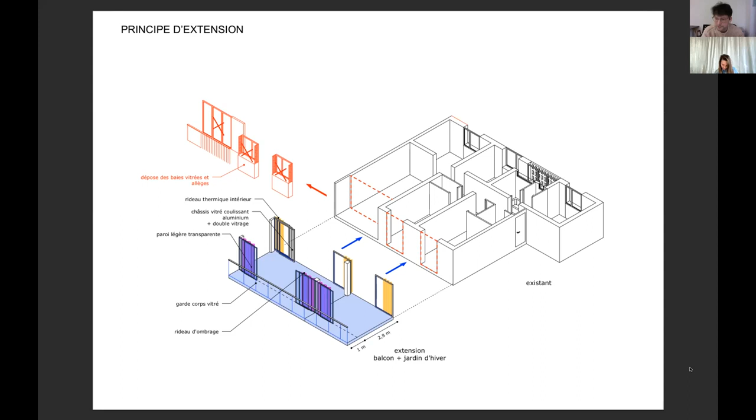So if you look at one apartment, this one is a 2-bedroom apartment, okay? You can see the existing state on the right. It's a 2-bedroom apartment, and it's a very functionalist way of thinking housing. So the problem is you are like locked inside the apartment. For example, when you are a child, if your mother is running after you, you cannot leave the place.

So bringing a new space outside, linked to the old apartment, gives you the space like in a house. I mean that you have an exterior space where you can move, and you can move in the apartment in another way, and you create a new link with the landscape and with the climate.

So from each room you can go into this winter garden, and this winter garden is very simple as a structure. The goal is to say that the more simple the structure is, the more freedom people have to invent the life they want inside this housing. It's like in a house, when you've got a garden, you can put all your stuff, your furniture there. It's a lot of freedom.

We need to bring more freedom into the way we live daily life in the apartment. So it's very precise, and at the same time, it is very undetermined in terms of space, so the people can choose what they want to do with it.

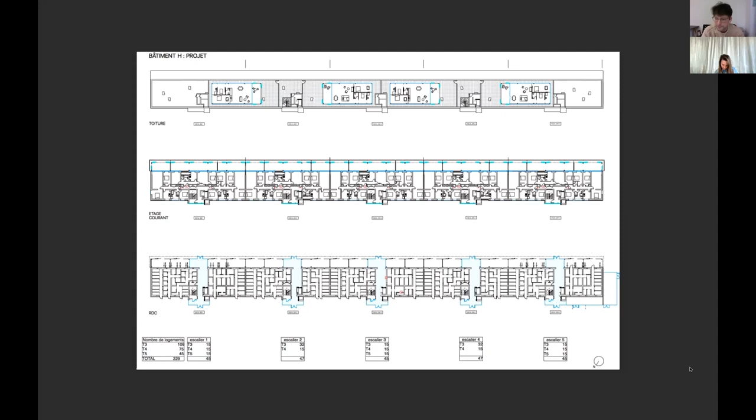So the common area now is a big hall that you can enter from both sides of the site. You have a common level on the layout in the middle, and the last level on top is the rooftop, because we also create new units on the rooftop of the building. We create small houses - it's a 2-bedroom apartment, and they are very, very large.

And this is how we did it. The floor are prefab concrete, and the fence is already on the concrete floor when we put it. That means when we put the floor, the worker can walk on it immediately, because we don't have to build a scaffolding for security reasons, since it's already very safe to be on the new floor. So the extension of the apartment was in fact the scaffolding for the construction time.

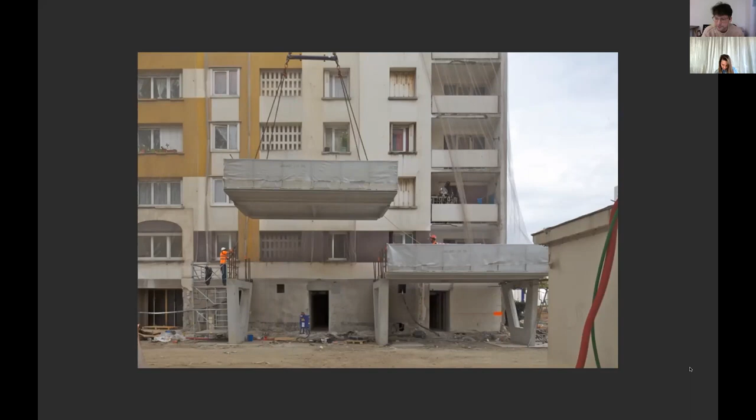With that process, we avoid disturbing the inhabitants a lot. So in this picture, for example, imagine that the people are cooking and watching TV behind the wall and the window.

After putting a floor, we put the pillars like this. They are prefab also, so no machine on the construction site, no noise, no dust, as less as you can. And after, you continue. We were making one level per day for like one staircase, and it's 5, 6 or 7 concrete floors per day.

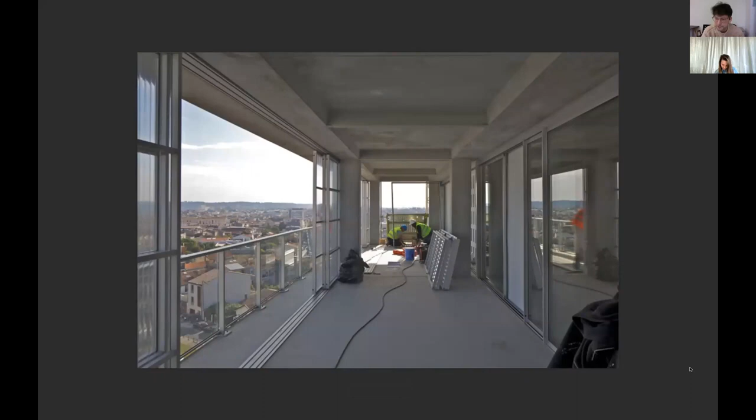After putting the floor, you can cut the facade and open the wall of the existing facade to put the window, the sliding glass window. And after, you put the facade of the winter garden. So in total, it's 5 days of work for one apartment.

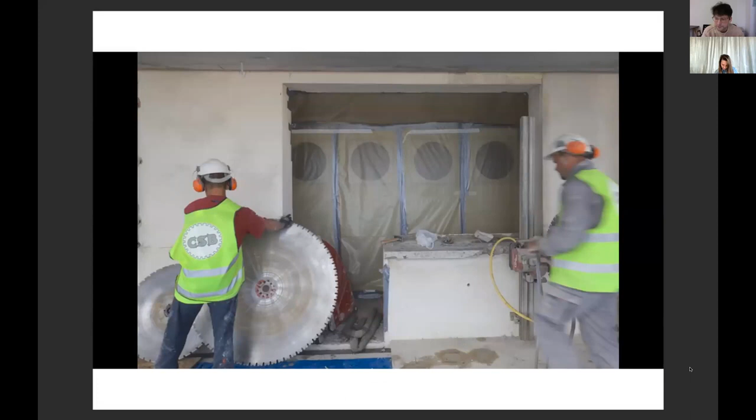This is the old facade. This is the very gentle machine we're using to cut the wall. Just on the back, you can see the temporary wall with protection to avoid the dust going into the apartment. And this is when the wall was taken down. You can see this person is watching TV behind the construction work. So it's a lot of noise during 1 or 2 hours.

But what is very important is we did one prototype of one apartment during the study of the project. It was a tool for us to explain to the people what the result would be. So they could visit it, move the curtain, move the window, and understand exactly what would be the benefit of the project. So people were very nice and kind, because they understood exactly what was the goal and what was the project before we start the construction.

Here's some examples of winter garden, and this winter garden is done also for a process of energy efficiency, because instead of putting insulation in the facade, you put 3 meters of air that you can live inside. So the concrete floor protects you from the sun in summertime for summer comfort, and in winter, the sun goes into this winter garden to heat the apartment very efficiently.

Can you see it now? No, not yet. Can I ask my colleague to share your presentation on screen and you just do the presentation? Okay, yeah, okay, sorry, okay. Marius, can you share the presentation of Paolo on the screen? Yeah, just a second. Yes, now we see the presentation. Okay, it's sharing. Yes, perfect, it's working. I just did the same thing twice. Sorry, okay, so thank you very much.

Thank you for inviting me to share with you some ideas and things we are trying to do. We have seen incredible presentations, so I will go briefly through some of the themes I wanted to share with you, because we're treated very well by other presenters before me, and also the moving presentation about the crime that was really making us think about the privilege of being here and discussing architecture and city.

Personally, as you said, I'm Paolo Mazzoleni. I'm an architect and an urban planner. I've been working the last 15 years around the idea of the city and how to plan and develop a good city to live in. We have tried to do this in very different ways, by designing, by planning. I also had an experience in our Order of Architects in Milan.

My last adventure, the last thing that happened to me, is that I've been called to Turin as a technician to try, let's say, to bring some competence to a new government of the city. We've been here a few months, so I'm not able to show you things done, because they are exactly as I'm saying, just things we are starting to do in this moment. But I will share with you the ideas we are working with and the aims we are putting on the ground.

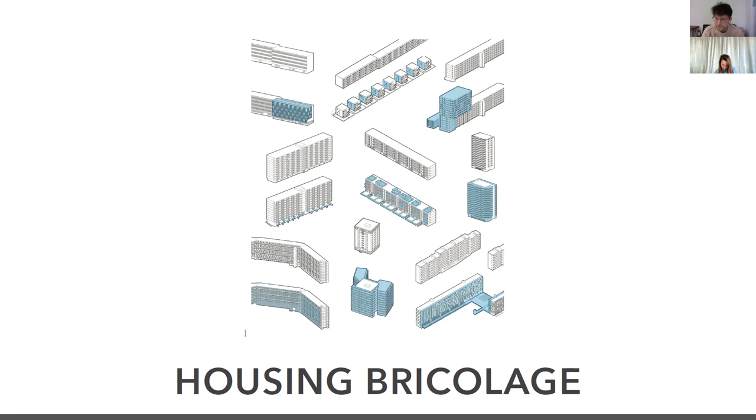We have focused on a lot of projects. We have analyzed a lot of projects all over Europe dealing with this matter that is, as we said, quite similar besides some differences around Europe, trying to make a kind of catalog of actions that we can do on these buildings. So assuming that it's a design, it's a project, and as a project, every time is different.

And as we have seen clearly in the last two presentations, if we have good architects, if we have good designers, we had good results.

Looking at the problem from the side of ruling it or building politics on it, we need, in a way, to make a catalog of this kind of operation. We also make an extensive work about the kind of operations we have observed these design projects are doing, and in a way, focusing on some themes.

For example, the ground level. Maybe the ground level was one of the bigger places of mistakes in these modern schemes, because of this theoretical but not so workable idea of pilotis, or trying to put a function that didn't survive the market, for example, and so on.

A lot of time the ground floor is the problem, or one of the problems, of this kind of scheme. The best examples we have analyzed deal a lot with the ground level, but also the ones we just viewed that were part of our analysis. On the counterpart, maybe for similar reasons, the roof level is another very critical point. Maybe the ground level is the more critical, and the roof level is the more rich of opportunities. So another point very interesting for us is the work on the roof level.

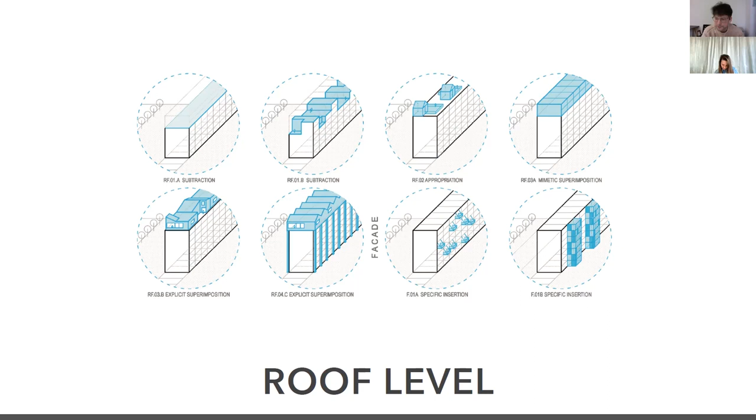Both of them cross a lot with the planning rules, because a lot of time the planning rules - I don't know if it's also in other countries, but in Italy it's like that in our cities - the planning rules are limiting the volumes also in public buildings. So the opportunity of working on the roof level, maybe adding something, has problems with the rules. And at the same time, working on the ground floor, which a lot of time means working also with function, has problems with the monofunctionality of a lot of our rules that are very obsolete.

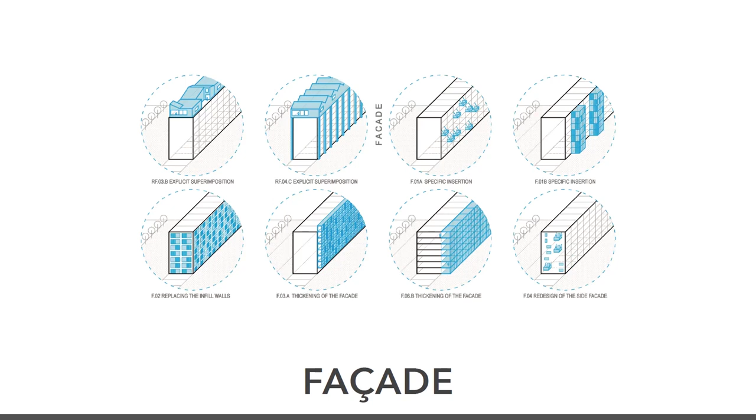As you can imagine, or maybe it's the same in other places, a third front of work, a third line of work, is the facade. We have seen incredible examples just now, because due to the way they were built, but also to the way they are changing, the way we use our buildings nowadays, the facade was really underestimated as a matter in these modernist schemes. So working on the facade is another point. It's quite interesting - I don't know how it was in your country, but the pandemic, for example in Italy, put the private open space on the facade back on top of the needs of the people.

We were all living inside our house and going on our balcony, or whatever we had, or also just sitting on the window bench - this was an action of freedom. People restarted talking to each other from the window or from the balconies. And so the facade as a part of the city came back, as maybe it was in the past - in Italy it was in the past - came back as a very urban place. And so all modern schemes revealed their weakness in this part, which was not, or the majority of the time was not, object of their project.

And then obviously we have the typological issue. Most of the modernist neighborhoods, the modernist buildings, were built with a simplified generic idea of the human, and of family in particular. We have an enormous amount of buildings built with the same typology, conceived for a family with 2 children - that was the idea. We are mother, father, and 2 children that normally have a male and a female.

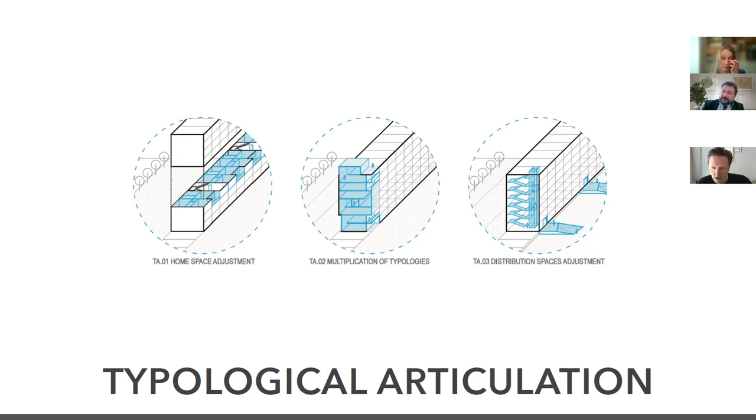So a revamp of the typological asset of the building is another strong problem, and another strong challenge. And also in this case, we have rules that don't fit, because our rules on typology are obsolete, and they are in a way of the same age as these projects. So they are still describing this kind of theoretical optimal flat made of two sleeping rooms, a kitchen, and one bathroom, and so on. Maybe we need something more complex, more flexible - all these things are very obvious to architects. We have been dealing with this in our competitions, in our schools, in our offices for the last 20 or 30 years. But reality is really far from having this as normality.

And also the buildings themselves - the morphology of the buildings themselves - can be an object of a lot of operations. Maybe not the demolition of all the buildings, but an intervention that can change, reshape, add, subtract. And we have a lot of very interesting examples all around Europe of this approach. But once more, this approach doesn't fit so well with our obsolete way of planning and governing the city. So what's the issue?

Last of this path of work, also the urban morphology, as we have seen in the last example, the morphology of the modernist neighborhood, it's very connected with a very simple and straight idea, the Athens idea of monofunctional neighborhoods with just housing and a lot of green and air. They are wonderful places in a way, but our idea of city is much more complicated, and so maybe we have to deal also with the urban morphology, put back the idea of street, vibrant street and walkability, inside these kinds of schemes.

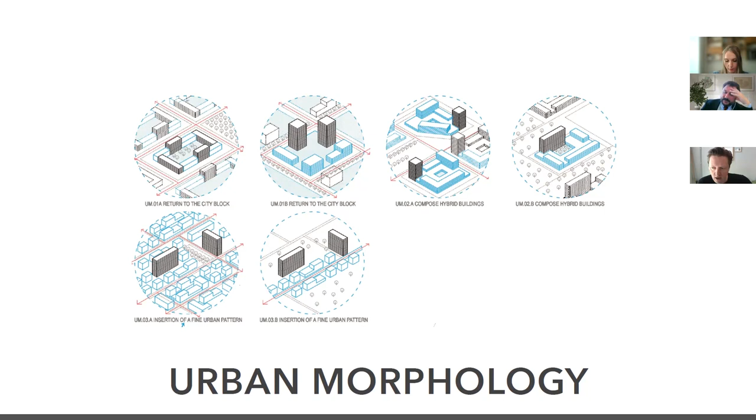So what I was saying, the point is, we do know how to do this, and today was very clear. There are very good examples all over Europe. The modern schemes are quite similar, or similar enough to learn a lot from other built examples, but at the same time, we in Italy are really far from having this inside our planning.

In general, we have a very obsolete way of dealing with the planning and growth of the city. So we have to start back from how we govern and plan, day by day and with perspective, our city. One of the bigger challenges we have with our new administration in Turin is that we have to rewrite the general plan. Our general plan is from '95 and was conceived at the end of the 80s.

So 30 years ago, almost 40 years ago, and maybe 3 crises ago, it was another city. It was an industrial plan. So we have to rewrite a plan in a completely different way. We are trying to work with some concepts, working with thematism and layerizing the planning, to focus in any layer, any theme, on a different issue with all the technicalities and things inside the problem, and also to be more efficient in being multidisciplinary. That is something completely absent in our actual plan, which is very design, very architectural.

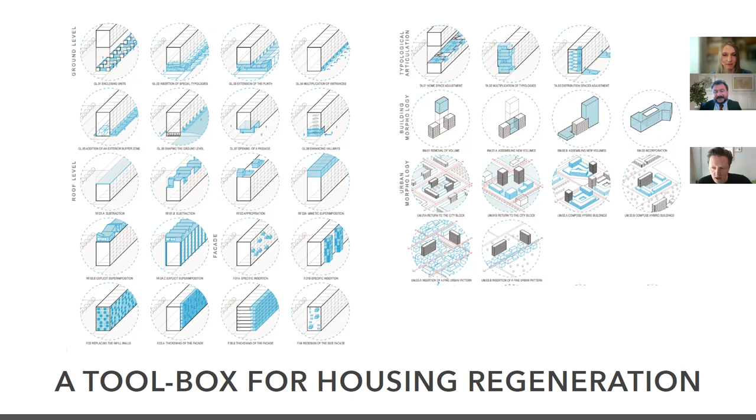So the very difficult challenge now is to translate the analysis we have made on all these very good examples. We have some in Italy, but taken from France, from the Netherlands, and from many other places, Germany mainly, but also others, and try to build this toolbox and convert it into rules and plans and practical things inside the way we govern the city, with the ambitious idea that this toolbox could reach even the urban level.

And so in a way, it gives us tools to reintegrate the modernist schemes inside the life of the city. That's very important because a lot of these schemes host the fragile part of the population, the non-wealthy part, the one that has suffered more from the pandemic. We need not just to refurbish, renew, redesign and rethink the place where they live, but also the way these places are connected inside the city as a network, the city as a tree, as we called it before.

Trying to be fixed on a city with these values that we have described. We believe the city should be strong, and we like a word that is anti-fragile, you maybe know that. We have used a lot in recent times the idea of the resilient city, the idea of a city that when it's hit by a problem can resist the challenge and preserve its qualities.